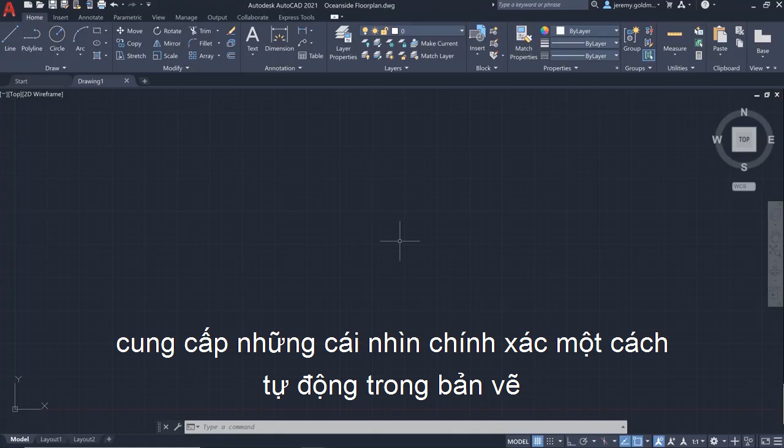In AutoCAD 2021, we've added a new drawing history feature, providing automatic insights right within the drawing to see the evolution of your work.

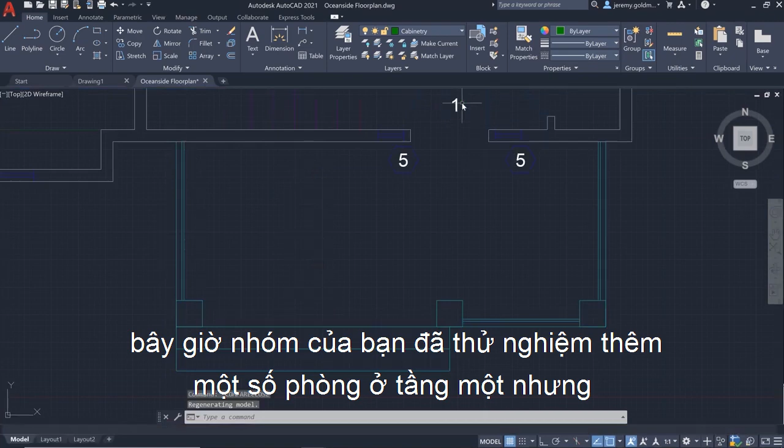Let's say you just got back from a meeting with a client to get feedback on some recent work. When you open the file, you're immediately notified that the drawing's been updated. You can enter a compare state to view the differences between the current version and the last one that you saved.

Your team experimented with adding some rooms on the first floor, but during the review, the client said she wanted to go back to an open floor plan that you had earlier. You can pull up the new Drawing History palette to see past versions of the drawing, and filter previous versions by who saved them or by when the drawing was saved.

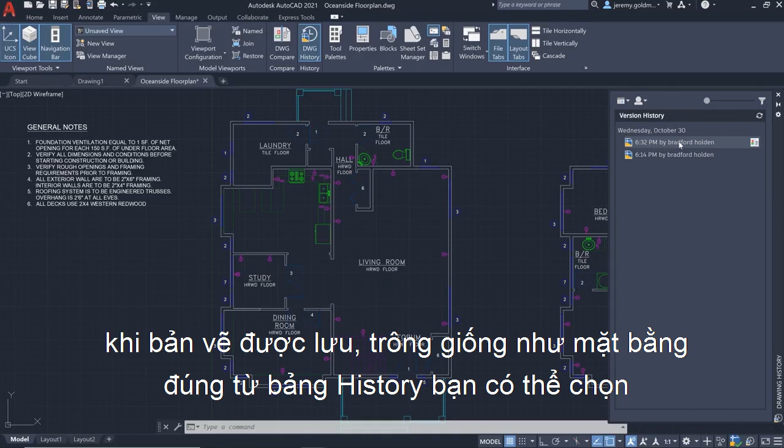This looks like the right plan. From the History palette, you can choose to compare this past version with the current drawing. You'll see the open floor plan from the previous version represented in red.

Let's turn off visibility for the previous version so you can select the new geometry and erase it. When you turn the previous version back on, it will show the open floor plan.

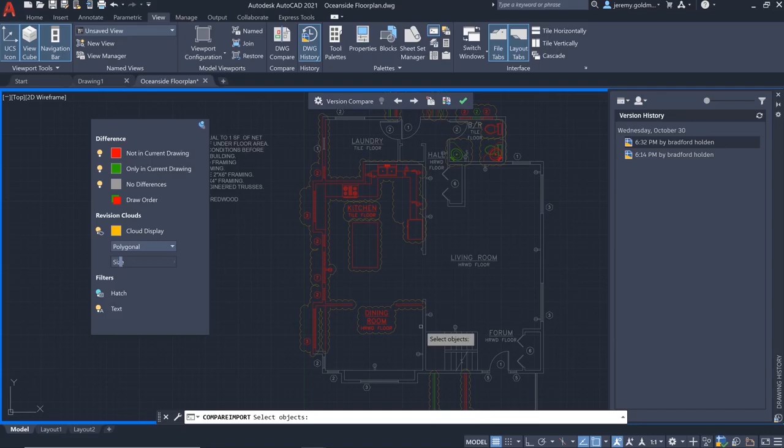You can use the import feature to bring this geometry into the current drawing. And since this is a live comparison, any deleted geometry that was shared by both versions will show in the previous version, so you can import that back to the current drawing.

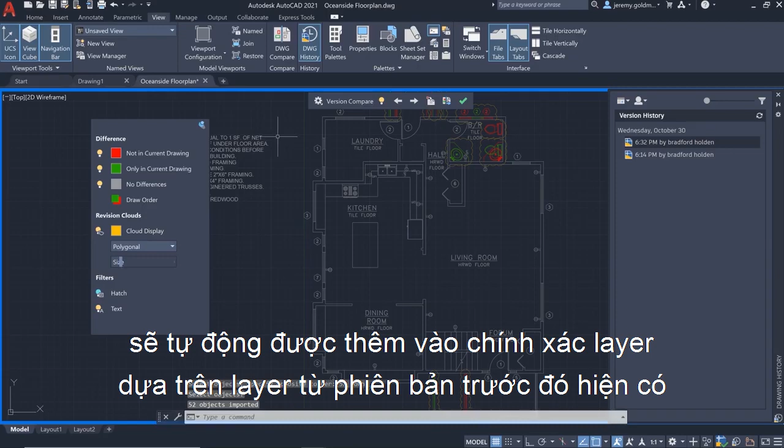So now the open floor plan is restored. One benefit here is that the geometry you import will automatically be added to the correct layer based on the layer from the previous version.

Now, there were some recent changes that you wanted to keep in the drawing. We can see them here again, and you can leave them in place and exit the compare state with the best of both versions. What's best is that we did this without having to save or manage separate file versions.

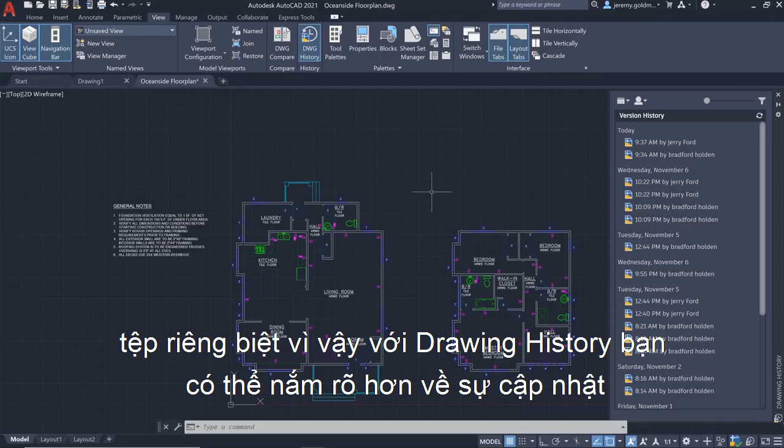So with Drawing History, you can get insight into the evolution of your work easier than ever before.